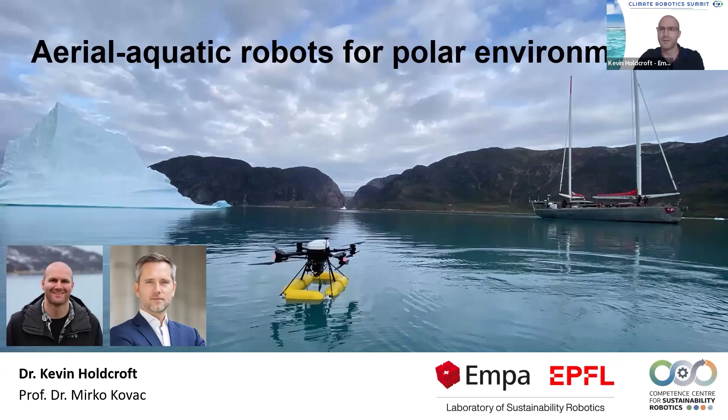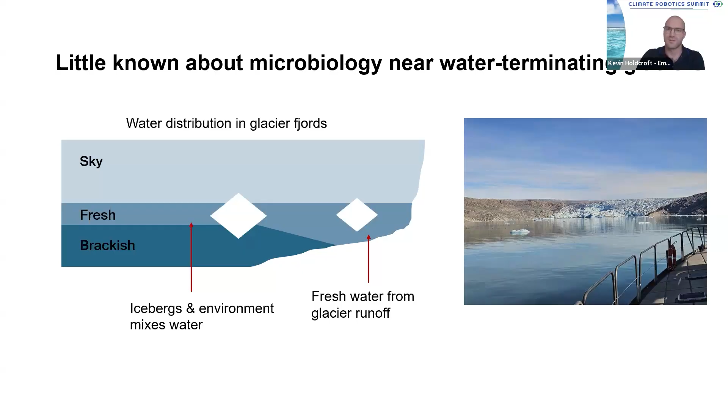It turns out that there's little known about the microbiology near water terminating glaciers. On the left, we have this cross section of what a glacier fjord looks like. We have the sky, and then a layer of fresh water, which comes from melting icebergs and melting glaciers. Underneath that, there's this kind of salty, brackish water that actually doesn't mix as well as you would think. The closer you get to the glacier, the more of the water column is taken up by this freshwater layer, and further out there is some mixing. The iceberg and the environment start to mix the water, and the microbes adapt, and there's less known. So there's a big question: how do we get close to glaciers and icebergs?

To this end, I want to introduce the Forel platform. We're lucky to work with the Forel Heritage Association, and they run this beautiful research vessel. It has a clean room on board, a wet lab on board, and a small mechanical workshop. It's intended for ecological research near coastlines, and in particular in polar environments. We were on this vessel in Greenland last summer.

To get close to these kind of dangerous regions, we use something called Medusa. In a nutshell, the Medusa is an aerial robot, a drone that is able to land on water, lower scientific payload, retrieve samples, and bring it back to the boat.

And this is awesome because it turns out collapsing glaciers and tipping icebergs can be quite dangerous, and so this allows us to get close. We go there, we record the samples, we do the measurements, and we bring it back. And because we're just landing on the water, touch and go, there's minimal environmental contamination. So this is really quite fantastic, and I love it.

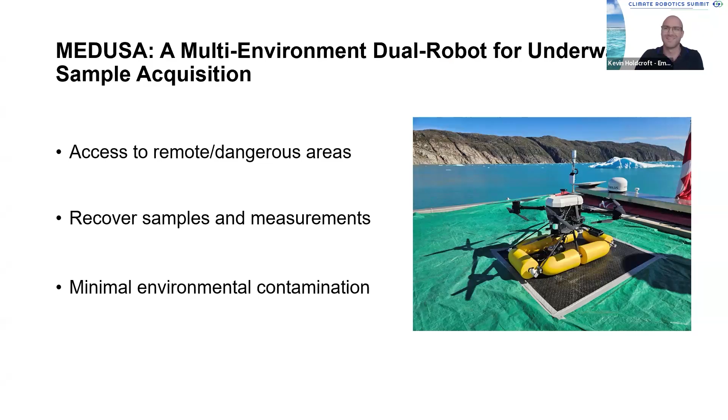It's technically quite challenging. There's a lot of considerations that go into the drone itself. This aerial aquatic transition is quite difficult. We have surface tension that's literally sucking the drone into the water, and so we have to consider that in our maths and our design for progressing this.

Similarly, standard oceanographic tools are too heavy for what we want on the drone. So we had to make a custom payload, a completely custom sensor suite, and a custom winch that would work in this environment. And of course, there's your standard system-wide trade-offs that you see in pretty much all of robotics.

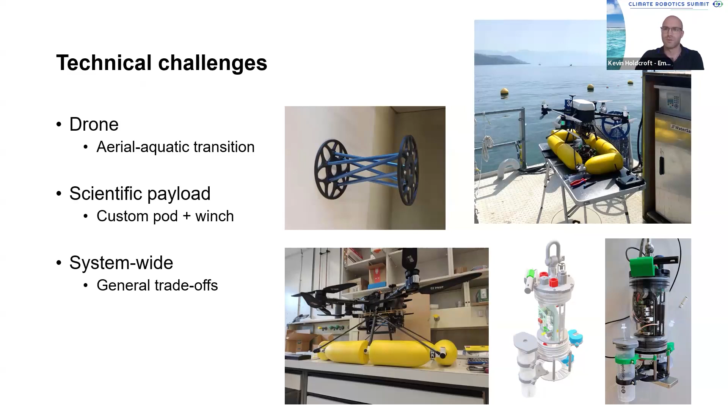Now, the catch is not only is this a custom system, but the TRL has to be high. This seems to be a theme of this conference, I would say. I think this is brought up in almost every session, but the technology readiness level has to be complete.

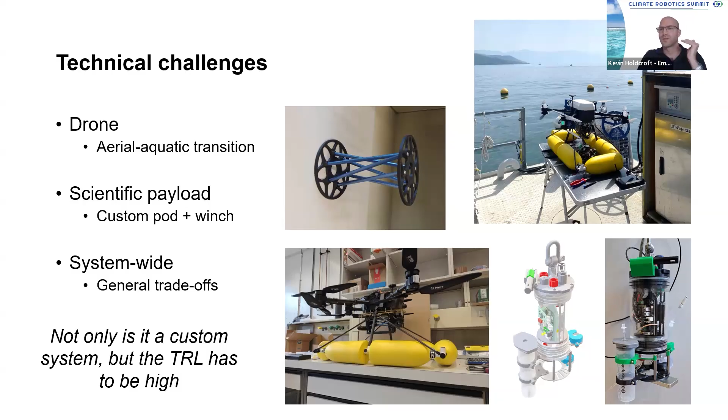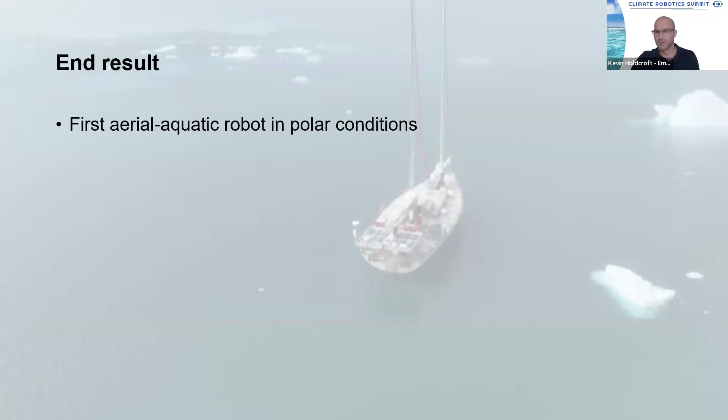So at the end, as far as we are aware, we have the first aerial aquatic robot in polar conditions. We are able to acquire these samples that are currently being processed, and we basically proved that, yes, this tool works.

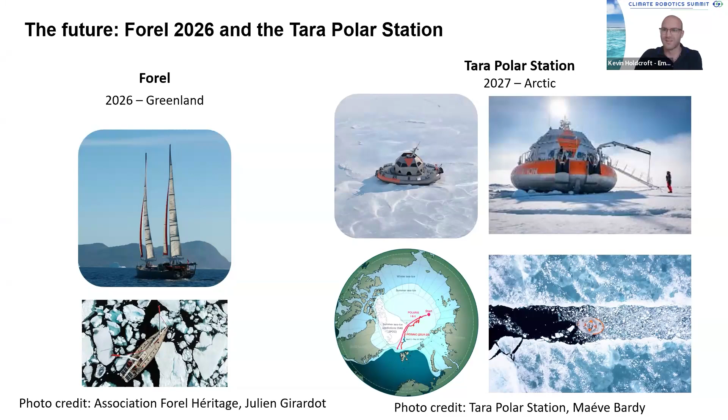So what's next? We're going back to Greenland this summer for a large sampling campaign, and I'm very excited to see how that goes and start to talk about that in the future. And lastly, we're members of the Tara Polar Station Consortium, and soon enough we will have our tools on board the Tara Polar Station, which will drift across the North Pole and provide insights that would otherwise be challenging to get.

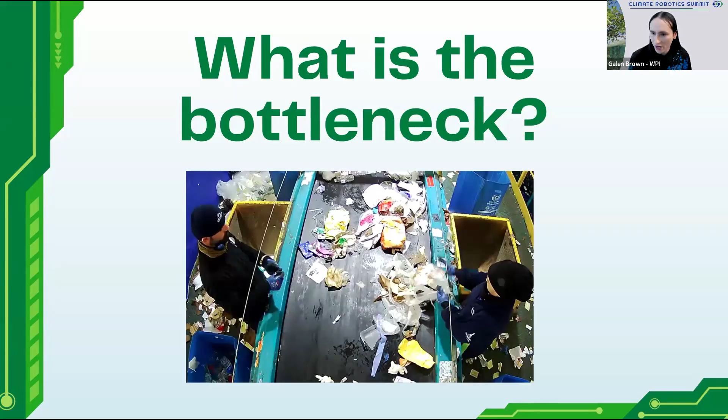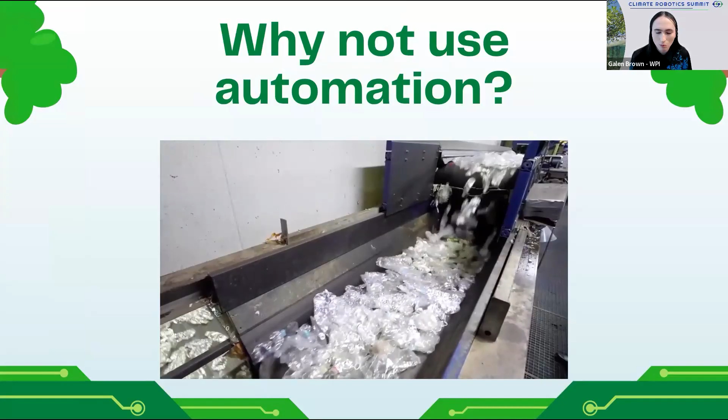So it's a robotics conference, the next question becomes, why haven't we automated this? The answer is that we have, to a large extent — material reclamation facilities in the US employ significant amounts of mechanical sorting that separates materials by material properties.

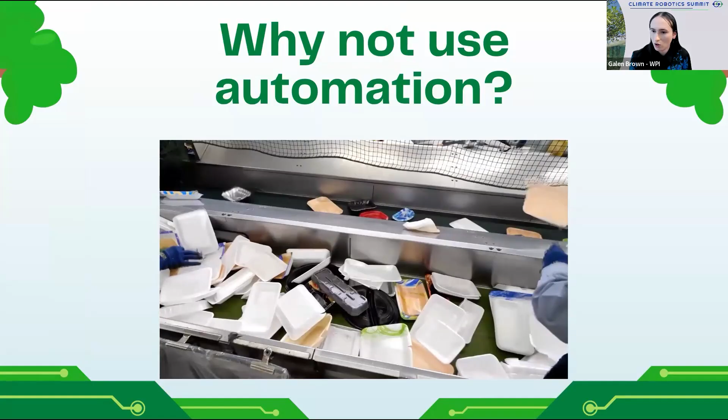But they're left with things which either slip through the cracks or have similar enough material properties that they can't be separated that way. And so you need a final hand sorting step, and that is what we'd like to automate. But the question still becomes, why haven't we automated this already? That I'm not the first person to think of this.

And the answer is data availability. For recycling in particular, the data is incredibly local — what waste looks like in Massachusetts, our home state, versus say California, is going to be extremely different. And that's a big problem because data annotation is extremely expensive for this area. In our past study, we found that it costs about $1.21 to annotate a single frame of recycling waste. That means to do a large data set like general purpose models are trained on would cost hundreds of millions or billions of dollars.

And that's a particular problem because recycling is a margin-sensitive industry. If we were making semiconductors, that might be plausible. But recycling sorting is extremely sensitive to the price of both the raw materials and the labor used.

You may have heard the story that the US doesn't do recycling, that we just send our recycling to China to be done there. That is not correct — we do a significant fraction of the recycling domestically. But there are materials, plastics in particular, where the difference in labor costs determines whether or not they can be economically recycled. So if the cost of labor is too high, wealthy areas will ship them to poorer areas, both in the US and around the world, to be sorted there.

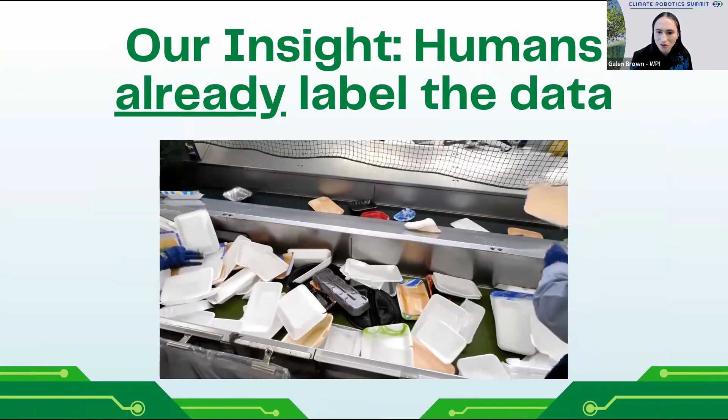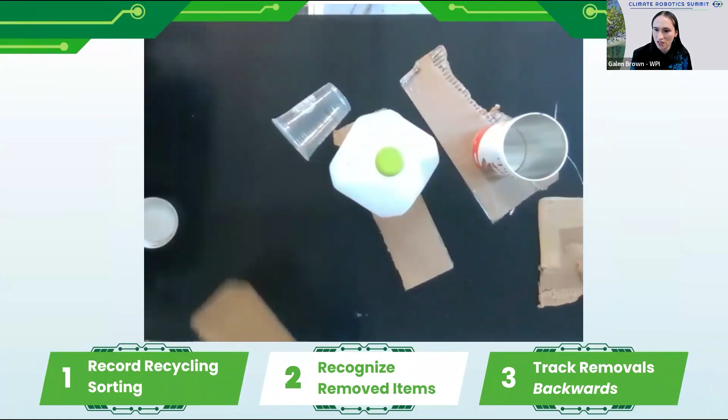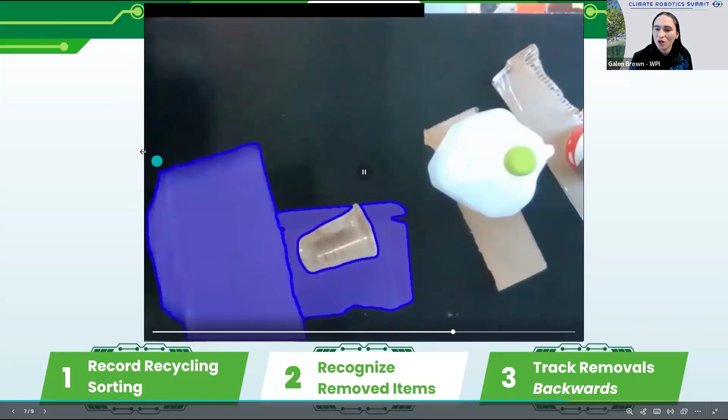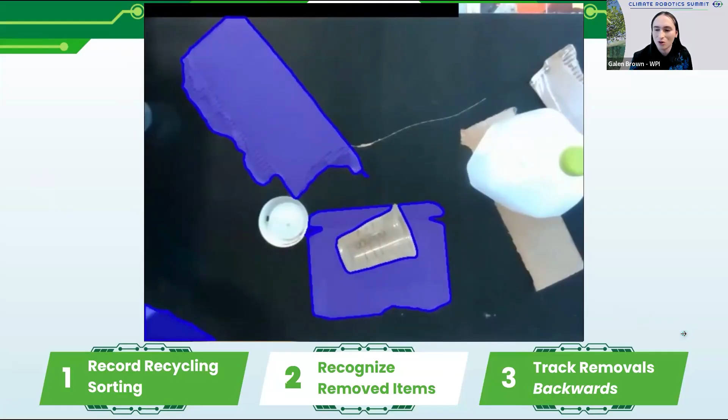So the big insight our lab had was that humans are already providing the labels for this sorting task. When people are doing this hand sorting — this is me sorting in our lab's pilot plant — they're manually labeling each of these as belonging to a particular category of material. So what we can do is identify the objects being removed, and then track them backwards through the video to create category labels, so we can take this image and say, this is going to be removed, it has to be cardboard. And that's completely automated, completely based on what people are already doing naturally.

And the advantage of that is that it's very low cost — the only expense here was adding an additional camera in this position, and we can produce as much training data as is needed from that. It's also individual data, because recycling is so location specific, you can't have a single master data set that everyone in the world uses.

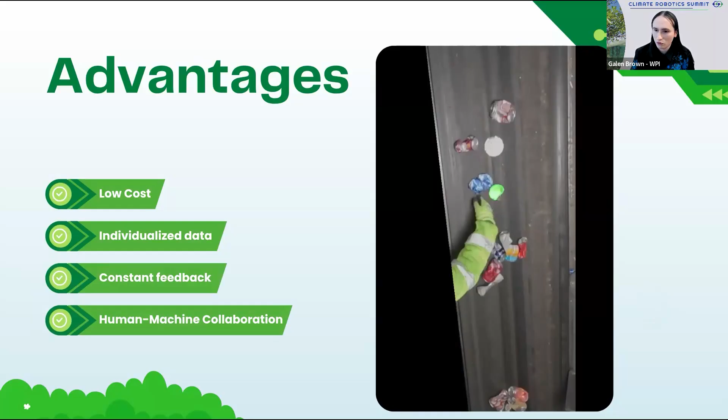This lets us go to each individual plant and produce their own data set for them, and lets us keep updating that data set as recycling changes, as new products are introduced, as the time of year changes, and the condition of the recycled material varies based on that. Finally, this enables a human-machine collaboration — we're not trying to cut the human out of the loop. We're trying to improve what they're doing naturally, to take an organic process and produce extra value from it, rather than eliminating people.

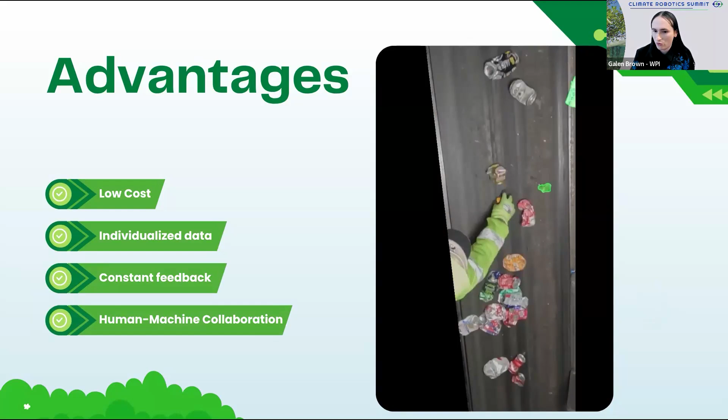Yes, so that's our work. Thank you very much for your time, and I'd be glad to answer any questions you have.

Thank you very much, Galen. Patrick, would you like to chime in? You know the stuff already inside out, right? This is really, really super stuff. I love this idea of enabling technologies to become more widely accessible as well. I suppose my question might be, so, is this ready for prime time?

I spend a lot of time working across the majority world, especially in Africa, and I know that waste management there is a challenge. So could this kind of setup really help enable much more localized and decentralized automation of this kind of waste management?

When can this be used in Kenya, for example? That's a great question and a real concern with these things. We have it already working in a local facility. We've partnered with Izmir in Turkey to start doing data processing there as well. We're talking to another recycling plant in the US. I think the answer is very soon, but every time we've gone to a new facility, we've found new challenges we weren't expecting.

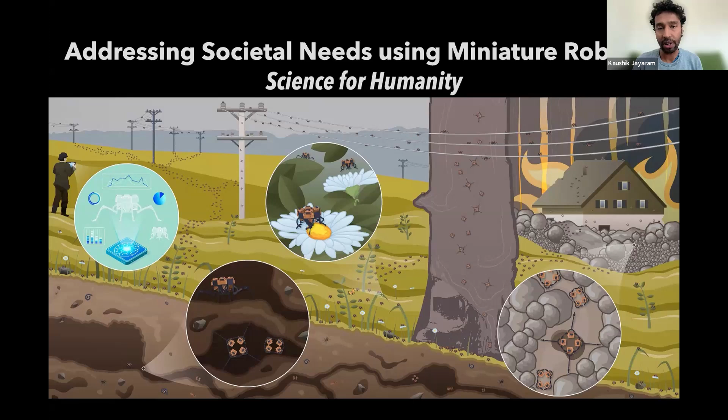In my lab, we've been building a bunch of robots at a variety of scales, going from palm scale all the way to penny scale. These robots can be tethered or untethered for different applications. One of the unique things is the way we build it — we can produce platforms at a variety of different scales with equal ease.

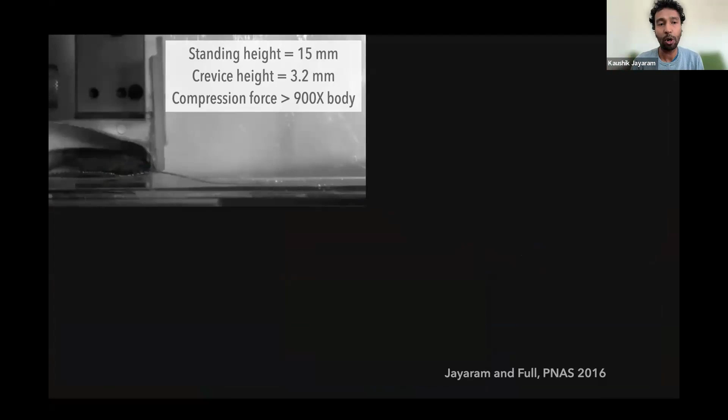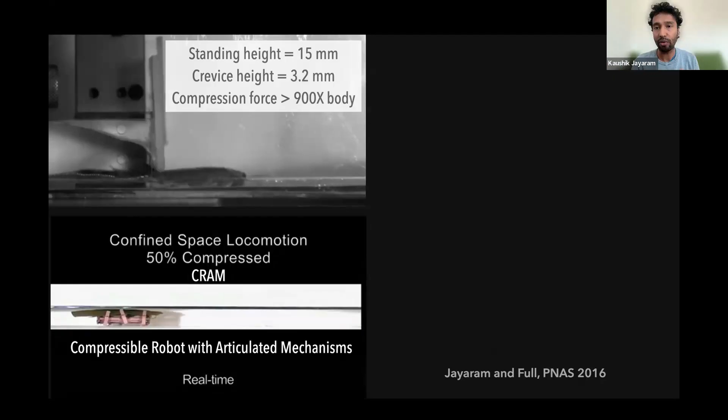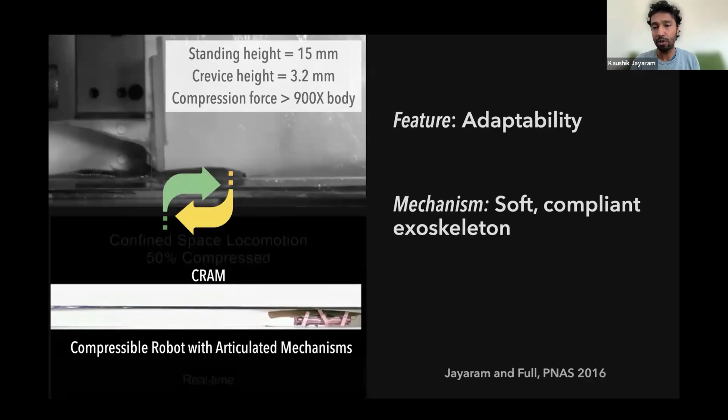One of the unique things about our robots is that they're compliant, or adaptable to environmental constraints. These have been inspired by looking at cockroaches and other biological organisms, which are masters at exploring difficult to access spaces. Inspired by cockroach locomotion in confined spaces, we engineered a robot called CRAM, which could compress itself vertically by over 50%. This is an example of the bio-inspired approach we use in our lab, enabling new capabilities such as adaptability using a soft, compliant exoskeleton mechanism to allow robots at this scale to move through confined spaces.

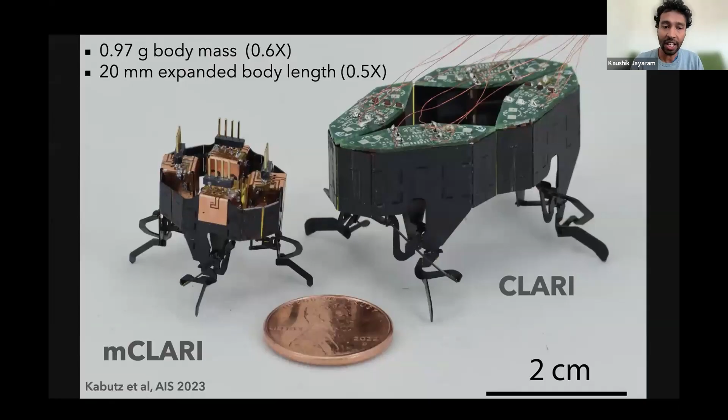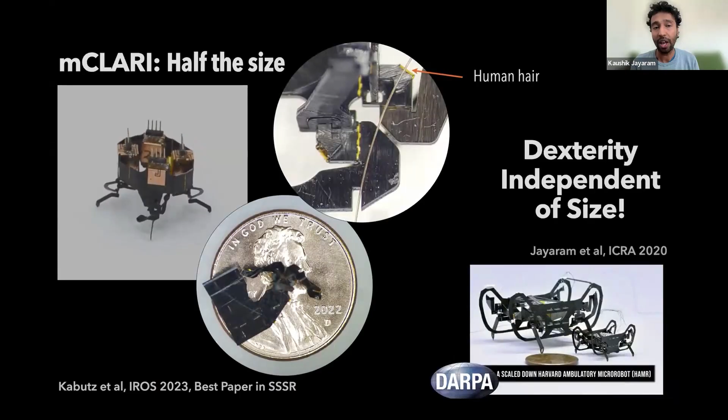More recently, we've been taking these larger platforms and shrinking them in size. Here's a half-scale version of this, which has a number of interesting mechanisms, some of the smallest about the size of a human hair. But because of the fabrication processes we use, we're able to maintain dexterity independent of size.

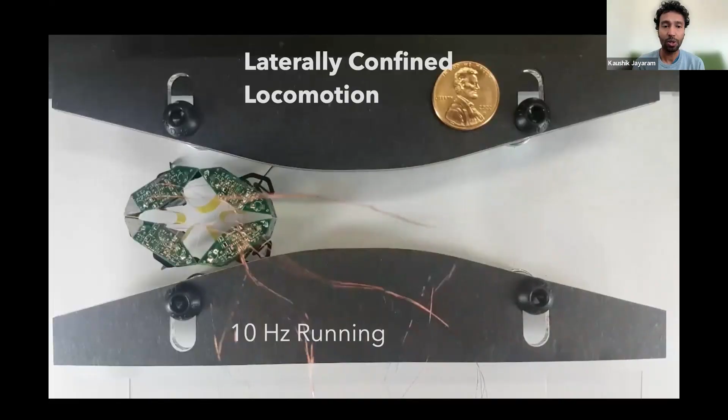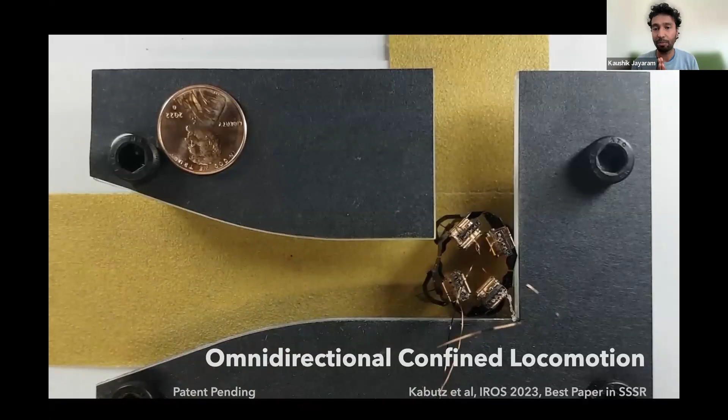These smaller robots are inspired by the similar larger robots you saw, but instead of compressing vertically like CRAM, this robot compresses laterally. What's more, they can compress one way all the way to the end, then omnidirectionally or orthogonally compress in the other direction just by switching the gaits, enabling complex locomotion in confined spaces.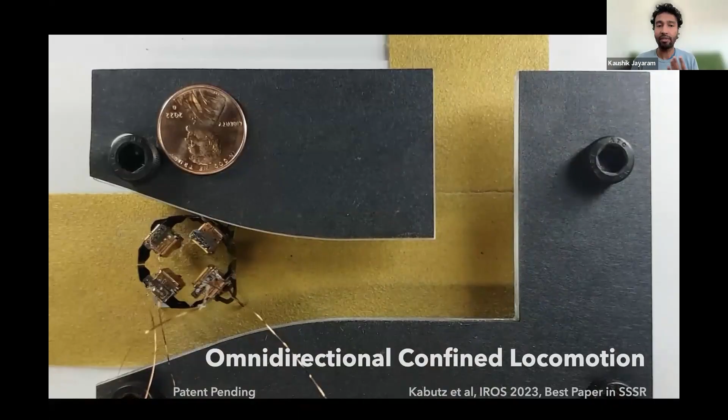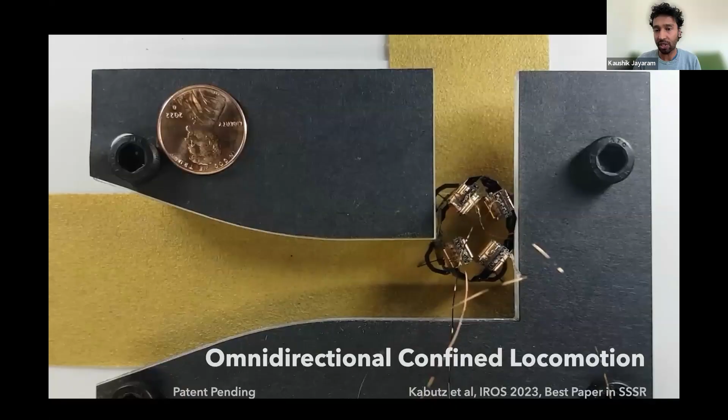We recognize that a lot of environments in nature are complex confined spaces, and we believe our technology can enable access to those spaces, where we can instrument them with a variety of sensors to help monitor and collect data about those specific environments.

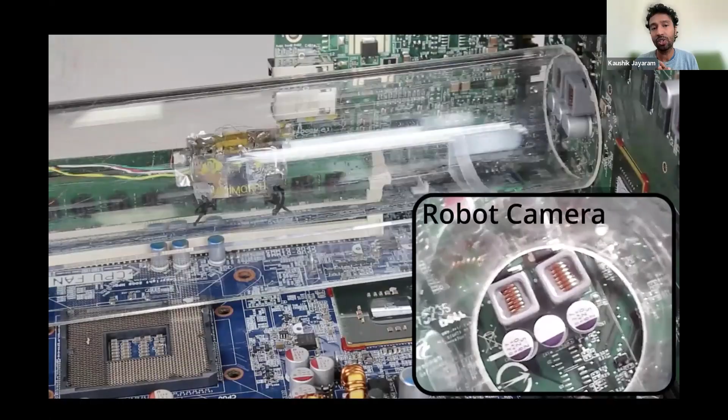For example, we've been integrating different sensors, one of them being a camera. Here you can see a live feed from a camera. Here we're showing more of an inspection task for industries, but we think similar approaches can be adapted for climate applications as well.

While we are building small scale legged robots, our team is also interested in making open source, low cost wheel systems which can carry all the electronics and things on board and be driven. Here's a series of robots inspired by some early work with collaborators at Boulder, who were using similar technologies for endoscope mechanisms, which we've adapted to explore burrows.

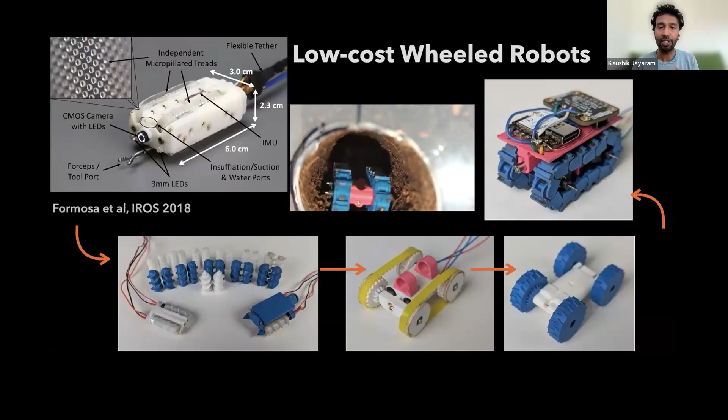We're working with collaborators to understand how mice build burrows and what kind of places they cache things in. This is basically early efforts to develop robotic platforms to assist with that.

That's my pitch, and I would love to work with climate scientists out there to understand some of the specific challenges you have in this space. I'm happy to take any questions.

Thank you so much. I just want to say I had the privilege to go to Kaushik's lab and see some of these myself, and these are great videos, but they are even cooler when you see them in person. Patrick, would you like to start?

Sure, thanks so much for sharing, Kaushik. Very cool stuff. I have two questions, you don't need to answer both. One is learning a bit more about the climate applications and use cases, whether it's climate sustainability or environment. The second is about energy autonomy, because in the videos I think we're seeing some wires, which of course is where it all starts. So I'm wondering what the autonomy would be out in the wild, and what other potential powering mechanisms you might be thinking of. I don't know what's possible at that scale, because it's really impressive how small it is.

Yeah, thanks for the questions, Patrick. So really quickly, we are open to a variety of different questions. I think the easiest or nearest entry points for us, where we see ourselves being helpful, is thinking of these robots as mobile IoT kind of sensors with legs, wheels, and other aspects, where we can gather information about the environment and pass it on to a server where you can do more complex processing.

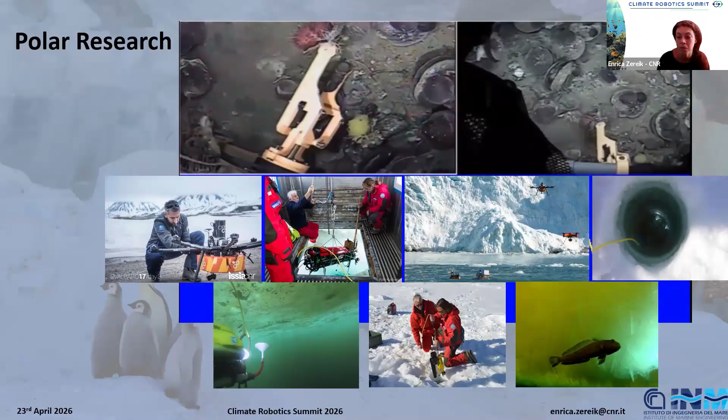Why the poles? Probably you all know the poles are very, very important to understand the planet's climate evolution, as a first perspective. But then also, it is a very harsh environment in which we need to have highly reliable systems from one side. But from the other perspective, the poles can be our test bench for our system. So if something can reliably work in the poles, probably it can work everywhere. So this is the claim.

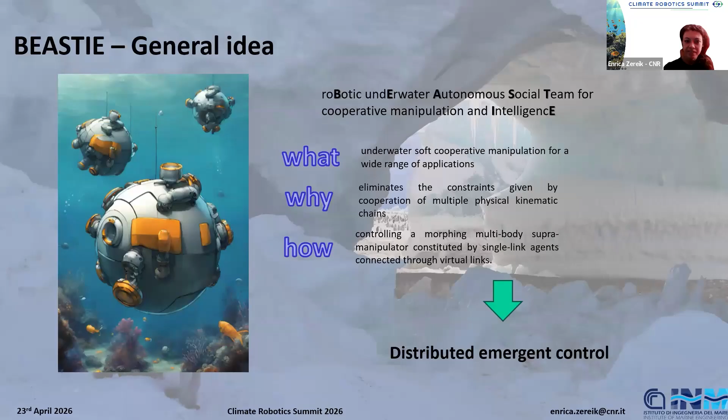So a fundamental brick, as I was saying, is to build reliable robots. Now we are working on this BEASTIE project that has been funded by the Italian Ministry of University and Research. Basically, in this project, we are creating an intelligent distributed emergent control for a swarm of small underwater robots. Here you can see the yellow platform that is one of the two vehicles that we developed in the framework of this project. I will skip the details because there's no time, but if you are curious, we can discuss later.

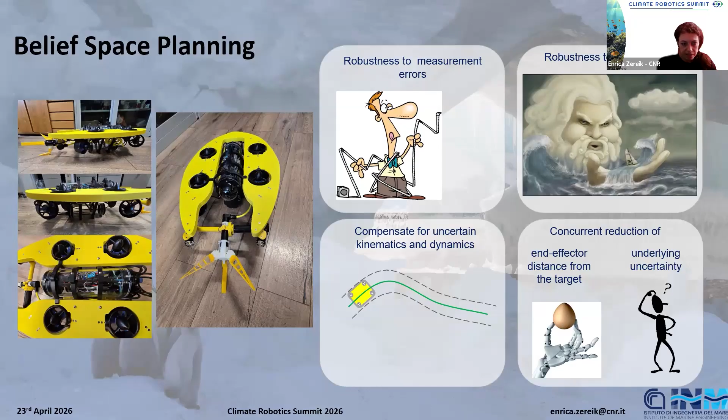Just want to say that we rely on an advanced control strategy based on stochastic control, not a classic PID or whatever control, MPC control. And notice that the yellow robot also has a gripper, and I will show you in a while.

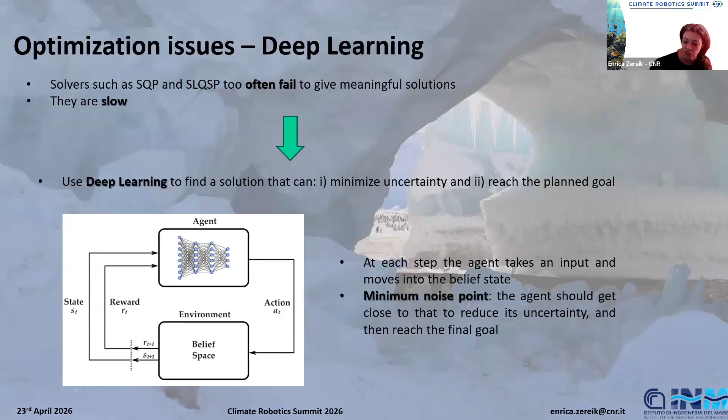This belief space planning approach has been mixed up with some deep learning to make the robot much more robust to dynamic missions and changing environments. Again, I'll skip the details, but for those of you used to working with AI, the shaping of a reward function is something very delicate. So we had some troubles and we had some solutions.

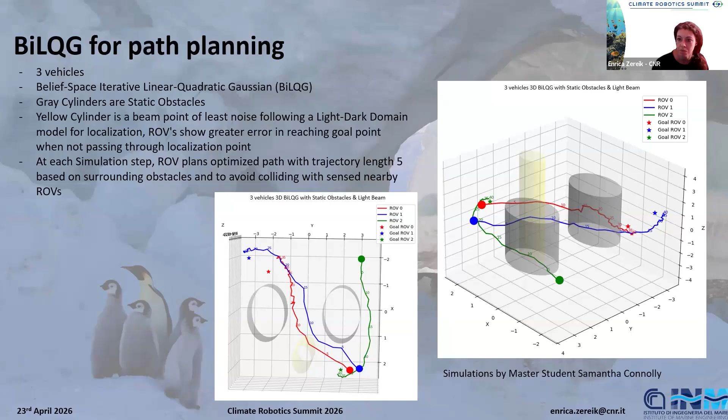But what I want to say is that we finally ended up with a stochastic control and a path planning that is able to avoid both static obstacles, like the gray cylinders that you can see here, but also it can avoid collisions among the moving robots in the swarm. And this is important, of course, because if you have more than one robot moving in the same environment, you should avoid collision in the very first place.

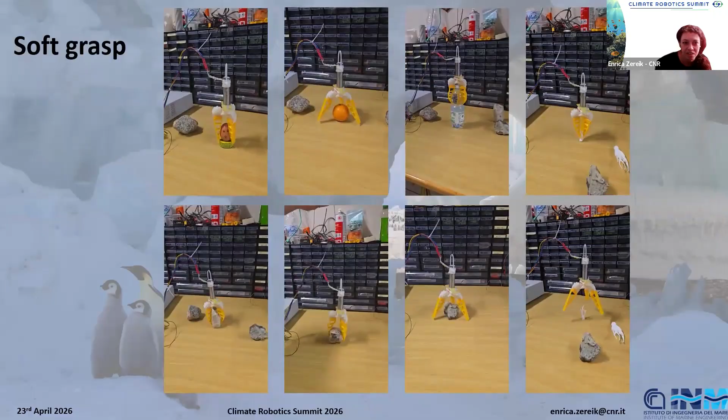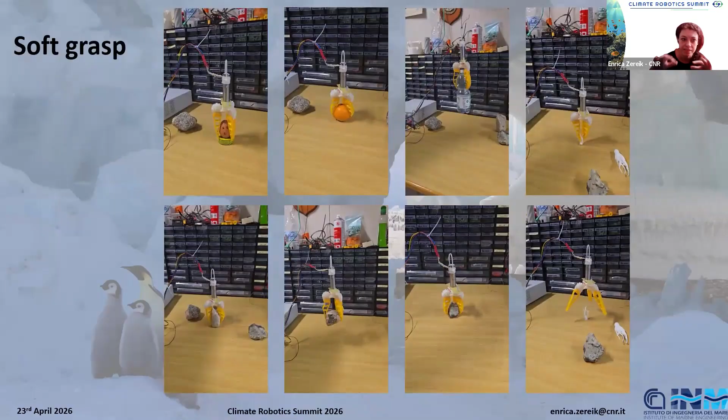Here, I'm sorry, there's audio, but it's just electrical noise. You can see that, as I said, the robots are endowed with a soft gripper that is able to carry weights in a delicate manner. For example, this is important for fragile organism sampling and adaptive grasping. And you can see from some of the video that the material is able to deform according to the shape of the object.

Last but not least, another basic brick is the reproducibility of our robotics research. This is currently not common, but my message is that if we really want to go toward the smart marine infrastructure that I showed you, with autonomous, reliable robots in a relevant environment, we should strongly focus on this reproducibility of our system. And this means basically benchmarking and performance assessment.

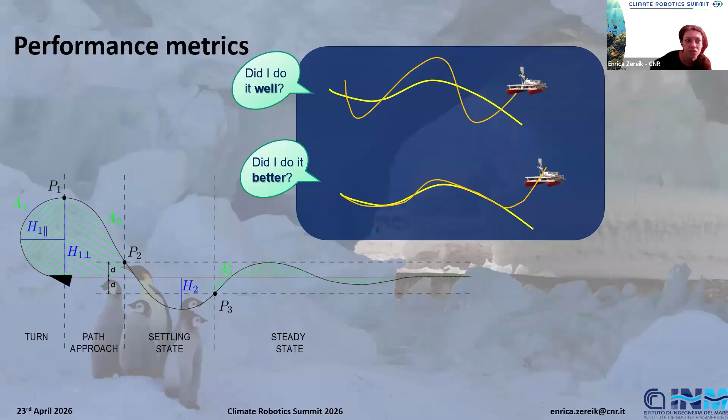For example, these two vehicles - which one did a better job? It depends. It depends on what you asked. It depends on the metrics that you are considering. It depends on a lot of stuff, you know?

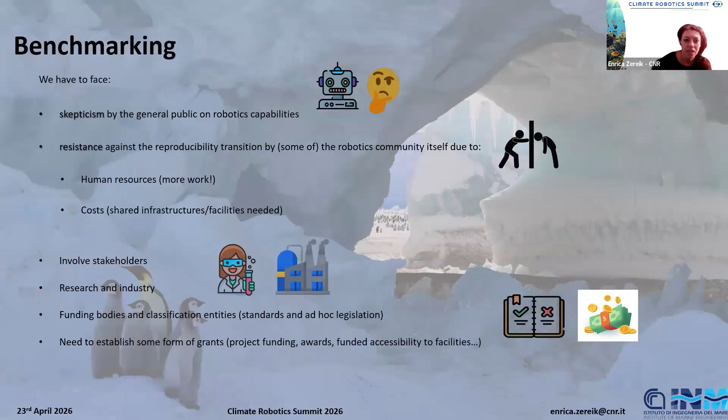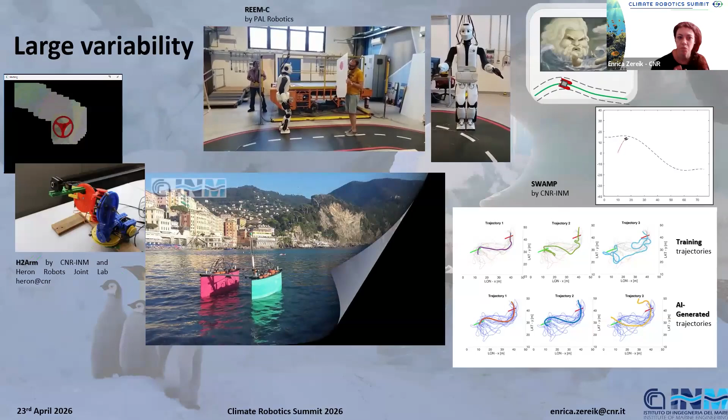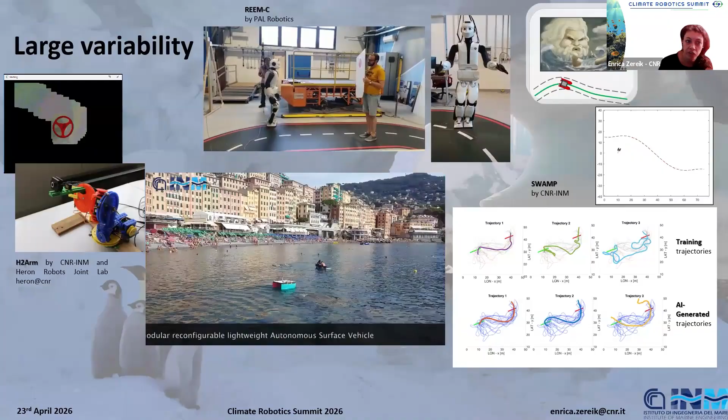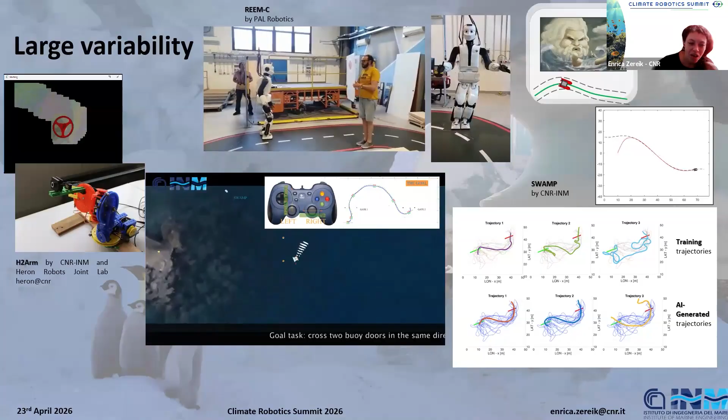We should push the community toward this direction because, of course, this kind of research requires more effort, but it also gives greater outcomes in terms of progress and capabilities for our robots. This is a big challenge. Think about how diverse our systems are, from humanoids to vehicles in water, to aerial vehicles, to manipulators. We have really different robots. Ending up with a metric or procedure able to assess any kind of robot is surely not easy.

However, I want to underline that we should really strongly focus on this. I'd like to warmly invite you to participate in this conference on this topic, Engineering Reliable Autonomous Systems, which will be held in Zagreb, Croatia, end of May. If you're curious about this reliability and reproducibility issue, you can participate with us and discuss with us. Thank you so much.

Thank you so much, Enrica. It was very interesting. Patrick, would you like to go or should I?

I have maybe an ignorant question, but thanks so much, Enrica. I'm really super interested in ocean tech and ocean robotics. I realize this may not be the focus of what you're doing, so you can ignore the question. I have the good fortune of being part of National Geographic's Explorers program, and I know colleagues who are oceanographers who come to me because I'm the robotics person, asking if I know any technology they could use for X, Y, Z. So my question is about usability and user friendliness for someone who's an oceanographer with no tech background. What would be involved in training that person enough to operate the technology? I know you're not necessarily looking at commercialization and products, so maybe it's not a very fair question, but I thought I'd ask anyway.